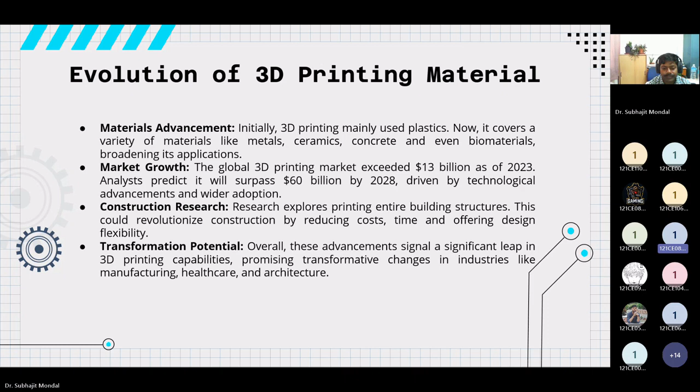Nowadays, most research is going on to create the most efficient and economic model of 3D printing so that we can design our structures very precisely.

Now talking about traditional construction technologies: to construct more complex and streamlined structures, we face many challenges. But due to the use of 3D printing, we are able to push past these challenges.

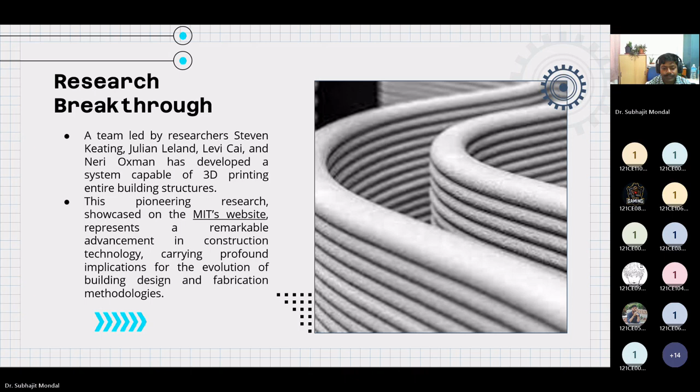Here is some research. A team led by four researchers created a 3D printed building structure. The main objective of this research is the study of the technical and environmental aspects of 3D printing, and it also covers the economic aspect of 3D printing.

Next is system overview. The 3D printing system is built upon a tracked vehicle. It can move in both directions, longitudinal and lateral, and this can be connected with robotic arms.

This enables meticulous control over the construction nozzles. Such a configuration guarantees unparalleled precision and efficiency throughout the printing process, ensuring accurate fabrication of building structures. The integration of advanced robotics by the research team pushes the boundaries of construction technology, laying the groundwork for more sophisticated and streamlined building fabrication methods.

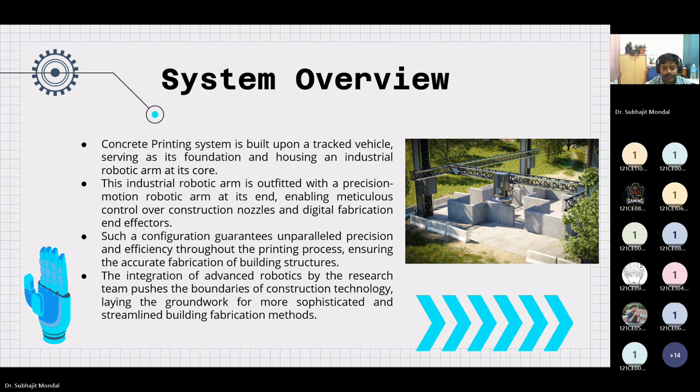Next is flexibility and scale. Previously, 3D printing was limited to a specific size of structure, meaning we could only build a specific size of structure. But due to increased flexibility and scalability, now we are able to build from small scale structures to large scale buildings also.

This innovative approach by researchers signifies a significant departure from conventional 3D printing systems and revolutionizes the fabrication of objects and buildings on a grand scale.

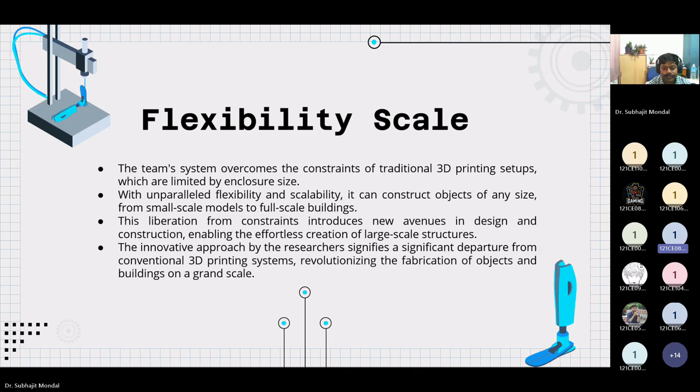Next is proof of concept. To prove the concept, the team created a dome structure around 50 feet in diameter and 12 feet high. They completed the structure within 14 hours.

This shows a remarkable feat and a testament to the system's potential for rapid and efficient construction, showcasing its real world application capabilities.

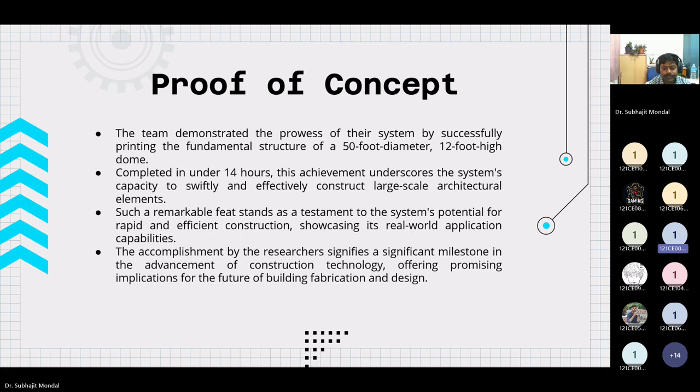Continuing further, talking about adaptability and sustainability: the researchers' system is designed with adaptability and sustainability in mind, allowing it to integrate smoothly into existing building sites and equipment configurations. A site of any size and shape can be used to make a structure using 3D printing of concrete. This integration reduces the need for costly modifications to infrastructure, presenting a more economical option for construction projects.

Furthermore, by utilizing local materials and renewable energy resources, the system enhances its environmental sustainability, minimizing its overall impact and cost. Their dedication to environmentally conscious construction practices aligns with broader industry trends towards sustainability and resource conservation, marking a positive step forward in construction technology.

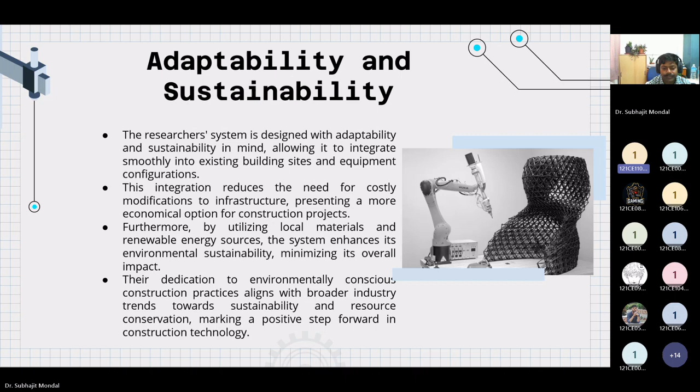Talking about potential applications, the system boasts diverse and expansive applications poised to revolutionize construction across various sectors. Its capabilities offer potential in transforming disaster relief endeavors by swiftly producing emergency shelters and infrastructure in affected regions in the real world.

Housing structures can also be made using 3D printing of concrete. Many may wonder how we can make real housing structures, as concrete is weak in tension. I would like to mention that nowadays, we can also plant reinforcement along with the printing using 3D printing technology.

Moving on to future vision. The researchers envision a future where autonomous construction systems utilize environmental data to enhance building design efficiently. We can also take inputs from different places where we build different structures and program the printing process accordingly. The shift towards data-driven construction holds the potential to revolutionize the industry, bringing transformative advantages to both terrestrial projects and extraterrestrial exploration missions.

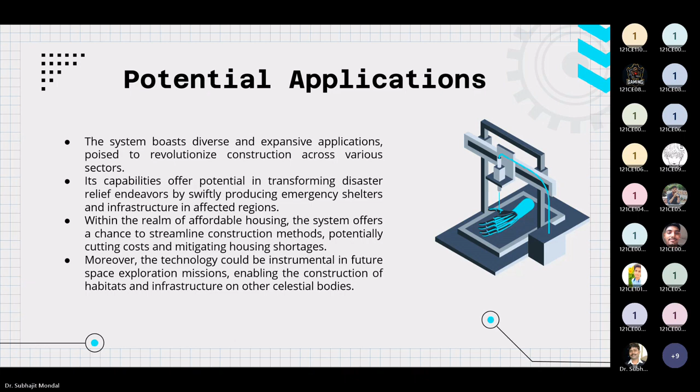Moving on to complex shapes and functions, the system offers unmatched design flexibility, effortlessly producing intricate shapes, overhangs, and integrated features. Its ability to construct complex structures defies traditional limitations in construction, empowering architects to pursue innovative designs. Additionally, the system's incorporation of wiring and plumbing during construction improves efficiency by simplifying the building process, and as I mentioned, also the planting of reinforcement.

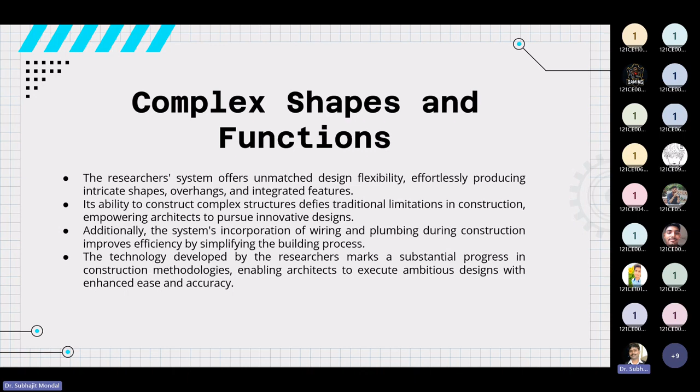Talking about safety and efficiency, since this is totally machine-dependent work, safety is very important, as well as efficiency. The researchers' system outperforms conventional construction methods by improving safety measures, decreasing labor requirements, and minimizing material waste. Incorporating advanced technologies guarantees a safer work environment, lowering risks linked to manual labor and construction operations. Many of you must have heard about accidents in construction sites; this can be avoided using machines and 3D printing technologies.

Through process optimization and task automation, the system notably diminishes the need for labor, enhancing workforce productivity. Moreover, the decrease in material waste results in cost reduction and environmental advantages, rendering the researchers' system a more sustainable and economically viable option for construction endeavors.

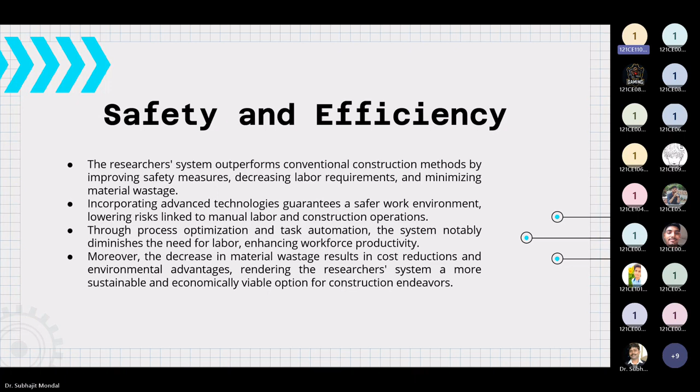Myself, Satya Sarthak, and to carry forward our presentation, I will start with biologically inspired design, something inspired by nature. The system leads the way in developing creative solutions that blend functionality, sustainability, and aesthetics seamlessly in building design. By mimicking biological processes and forms, the researchers' approach provides a comprehensive model for crafting buildings that are efficient and visually appealing. This shift in perspective represents a notable progression in architectural theory and applications, prompting a greater fusion of natural principles into the built environment for a more sustainable and harmonious future.

By doing this, we aim to make concrete printing more effective and use fewer resources while creating stronger and more durable structures. By this, we minimize waste and also maximize productivity, and this also enhances the eco-friendly nature of our 3D printing.

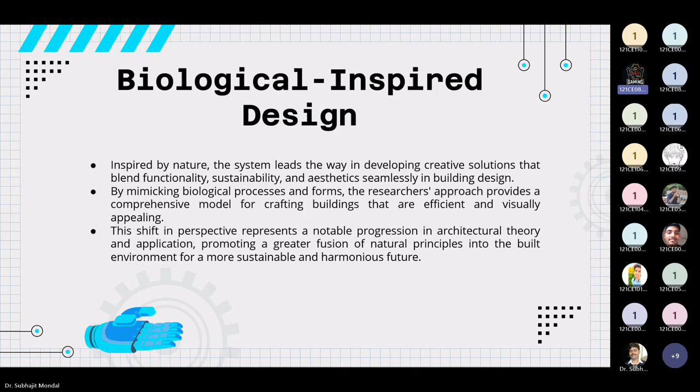Moving forward, we can see the integration of environmental data. These researchers utilize environmental data to refine building design, enabling instant adjustment for improved performance. Embedded sensors within the system track crucial factors like temperature, light, and humidity levels. This ongoing monitoring empowers the system to make adaptive changes, guaranteeing optimal conditions for both comfort and efficiency. Harnessing environmental data, the researchers' methods showcase a proactive stance in building design, emphasizing occupant well-being and environmental sustainability.

By integrating environmental data, we can make the concrete printing process more efficient, reduce waste, and create structures that are better suited for their surroundings. This helps us build more sustainable and environmentally friendly infrastructure.

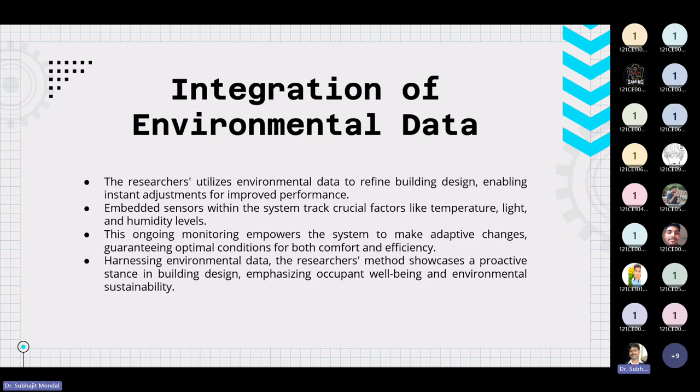So moving forward, you can see the material diversity here. The system offers a wide array of printable materials, including foam insulation, concrete, and potentially biologically enhanced materials. This extensive material selection broadens the scope of construction options, facilitating the development of inventive and eco-friendly building solutions. Whether it's for lightweight insulation or sturdy structural components, the system provides adaptability to address various construction requirements.

By diversifying the materials we use in 3D printing concrete, engineers can enhance properties such as strength, durability, flexibility, and sustainability. So this enables the creation of structures that are better suited for specific applications, environments, and performance requirements.

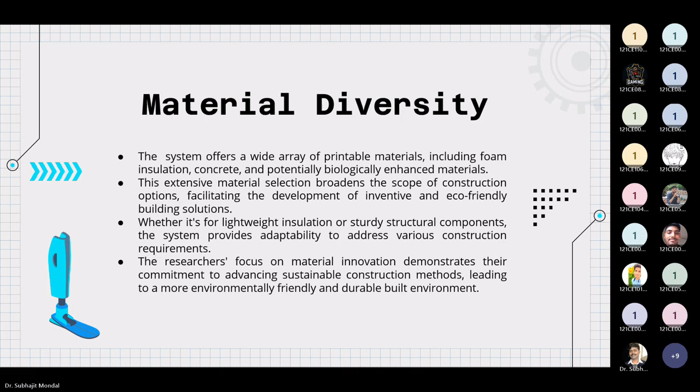So with this, let's come to the economic factor. If you have a fixed amount of budget for some project, we have to divide the budget or the capital into major aspects. So here are a few major aspects like labor, material, and equipment. So labor costs, material costs, and equipment costs are the important aspects of our project or a construction

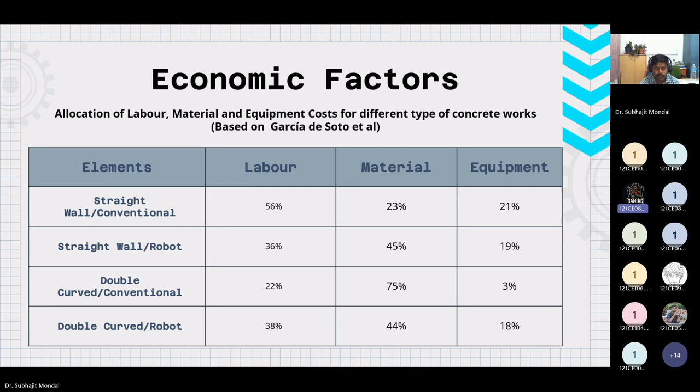At last but not the least, I want to conclude that this groundbreaking research on 3D printing in construction marks a monumental leap forward for the industry, offering unprecedented opportunity for innovation, sustainability, and social impact. By pushing the boundaries of traditional construction methods and embracing cutting-edge technology, MIT has paved the way for a future where building design is not only more efficient and cost-effective, but also more harmonious with the environment and responsive to the needs of communities worldwide.